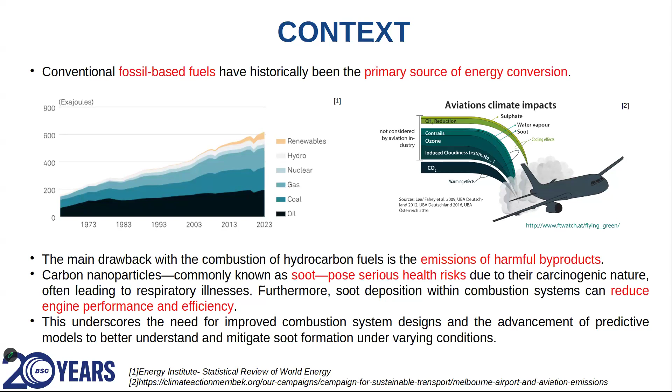There are other byproducts as well, out of which one is soot, which is basically carbon nanoparticles. And soot causes serious health risks because they're carcinogenic and they lead to different respiratory illnesses. And the other disadvantage of soot is that once it gets deposited, it can reduce the efficiency and also affect the performance of any combustion system. So because of these reasons, there is a need to better understand soot formation and also bring improvements in the models to understand and also mitigate soot formation.

So that's the introduction to what exactly soot is and how it is formed. Soot has been studied extensively over the past decades because of its health and environmental hazards. So basically, as I mentioned, soot consists of carbon nanoparticles that are generated because of hydrocarbon combustion, and it's a very intricate and multi-stage process, which I'll be explaining now.

So initially the fuel breaks down to form aromatic rings. This process is called fuel pyrolysis. These aromatic rings are called polycyclic aromatic hydrocarbons. The first soot particle is formed when two polycyclic aromatic hydrocarbons combine. This process is called nucleation. So this gives the birth of a soot particle. Once we have a soot particle, it combines with a polycyclic aromatic hydrocarbon to form a larger soot particle. This process is called condensation.

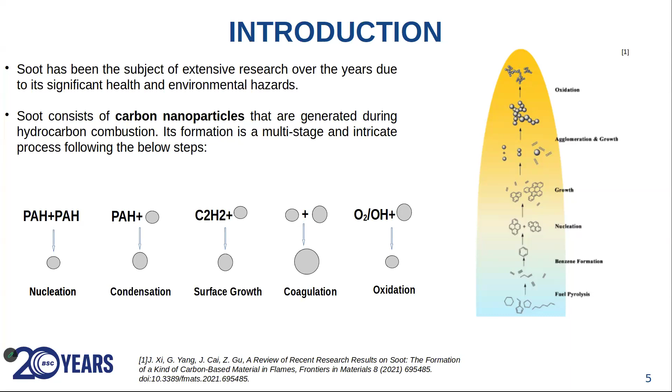Then we have acetylene in the environment. This combines with the soot particle at the surface, and it again leads to growth of the soot particle. This process is called surface growth. And once you have enough soot particles, two soot particles can collide and form a larger soot particle. This process is called coagulation. And once a soot particle comes in contact with either oxygen or OH radical in the environment, this consumes the soot which is being formed. This process is called oxidation. So these are the steps involved in the formation of soot.

So as I mentioned, soot has been studied over many years and across different length scales. First, in the micro scale, we study the interactions between the soot molecules. So that's the lowest form. We have two different types of models: discrete element soot model and also molecular dynamics. In this case, we study how two soot molecules interact, the molecular forces, the van der Waals forces, and the intermolecular distance between two particles.

When we come to mesoscale, it's an overall representation of soot. In that case, we have the Monte Carlo method, which gives us the particle size distribution of soot. But this method is computationally very intensive. And then we have the discrete sectional method. In this case, the soot particles are divided into sections or bins, depending on their size. Under this, we have two types of models, the univariate and the bivariate sectional model.

The other method is the method of moments. In this case also, we get the particle size distribution of the soot particles. But the disadvantage with the method of moments and the quadrature method of moments is that we don't get real-time information of the soot particles. This disadvantage was overcome in the direct quadrature method of moments, where we get real-time information of the particle size distribution.

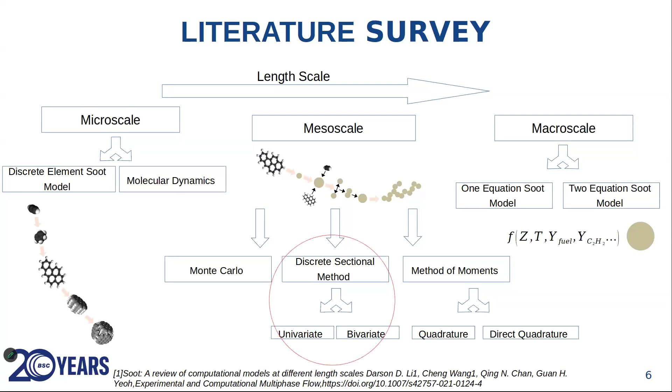So in our group, we specifically focus on the discrete sectional method, and specifically on the univariate and the bivariate sectional method. When it comes to the univariate sectional method, we solve only for one equation in each section, which is the soot mass fraction. And when it comes to the bivariate sectional soot model, we solve for two equations per section, which is the number density of agglomerates and the number density of particles.

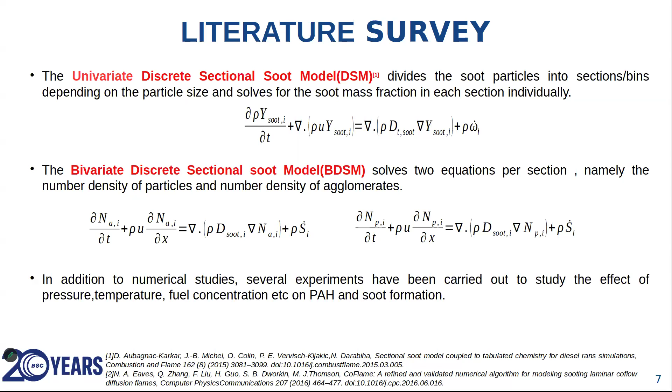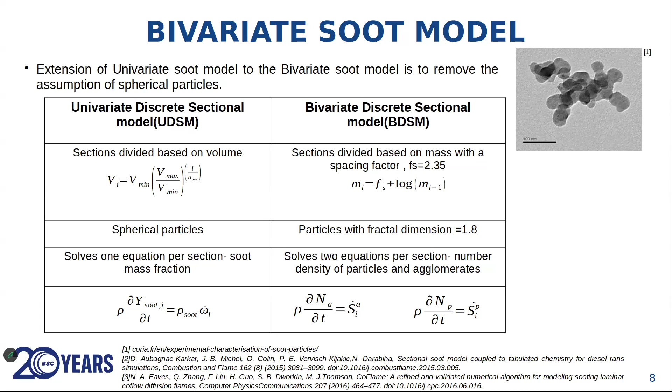So when it comes to the univariate soot model, we divide the particles in terms of volume. And in case of the bivariate soot model, we divide it into sections in terms of mass. In univariate, the main assumption is that it's spherical particles. In bivariate, we consider particles with a fractal dimension of 1.8. The univariate solves one equation per section, which is the soot mass fraction, and the bivariate discrete sectional model solves two equations per section, which is the number density of particles and agglomerates.

So the main objective of the work which I'll be performing is to develop models for predicting soot formation from aircraft engines. To reach this objective, we have divided the work into the following. The first thing will be to extend the existing univariate model to the bivariate soot model. Then we'll be studying the effect of the different processes which I mentioned before on soot formation.

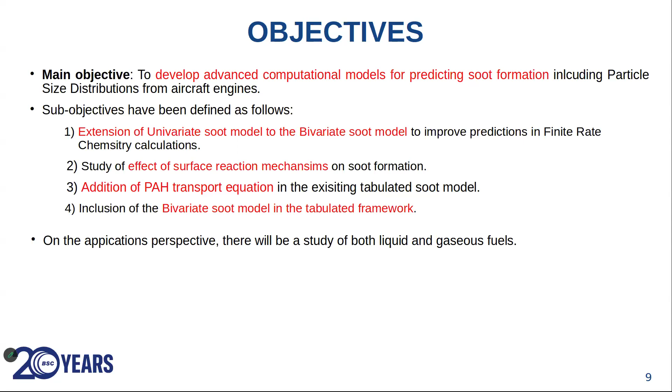And then we have a tabulated chemistry model in our group, so we'll be adding a transport equation to that to see how that affects soot formation. And on the applications perspective, initially it'll be gaseous fuels, but then we'll also be shifting towards liquid fuels as well.

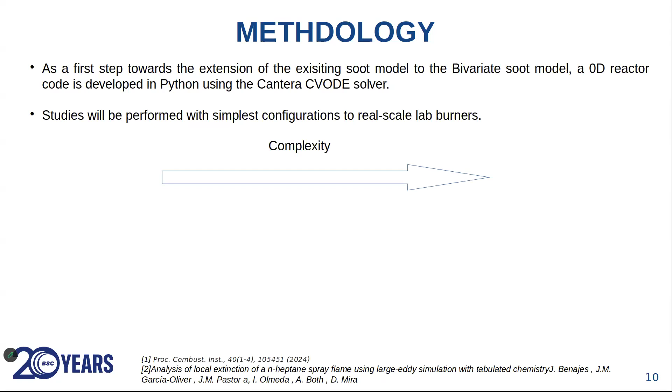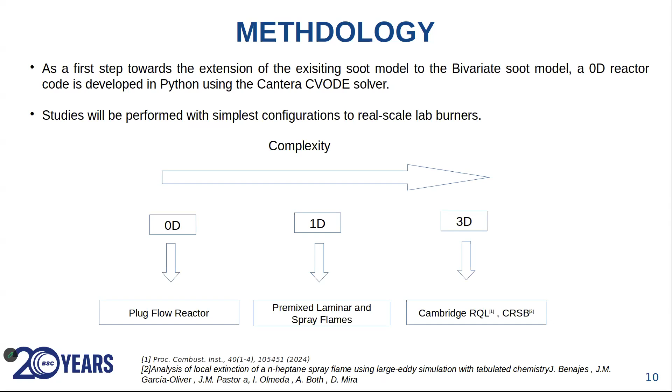So as a first step for going from the univariate to the bivariate model, a 0D code in Python was developed. Basically we'll be going from 0D to 3D, which is the most realistic case. In terms of complexity, we have 0D cases, 1D cases, and 3D cases. In 0D, we work with a plug flow reactor, and in 1D, we have premixed laminar and spray flames. And in 3D, we have realistic burners like from Cambridge and also the CRSB.

When it comes to the 0D plug flow reactor, it means that we don't have any variations in the transverse direction. That's why it's called 0D. For the code development, a temporal transformation was applied, and we solved for the species and the temperature. Also, depending on the soot model, either univariate or bivariate, we solve either one or two equations for each of the sections.

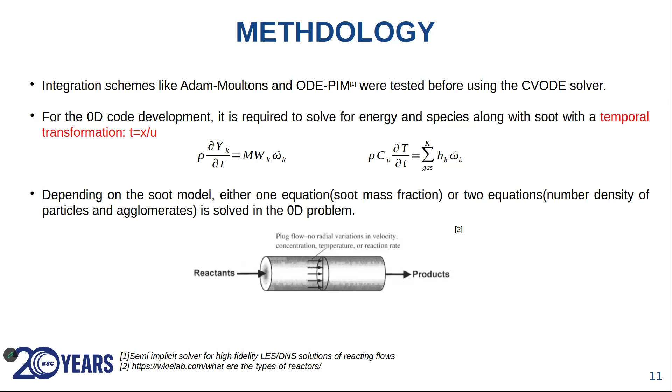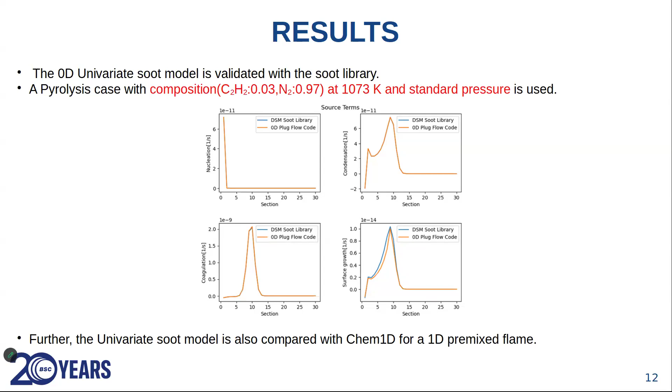The validation of the 0D code was performed with the existing soot library in our group. This one is the results for the univariate. This was to get confidence that the code developed in 0D works well with the already existing code. The next step was to check if the 0D code works well for the bivariate model as well. For the bivariate model, we have the nanoparticle plug flow reactor, which is an open source code, so the 0D code was compared with the results from the nano plug flow reactor.

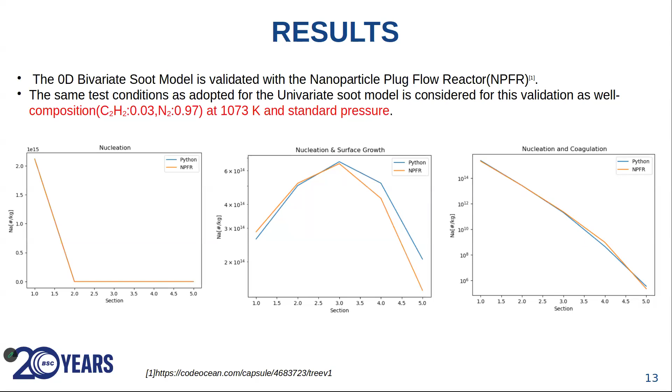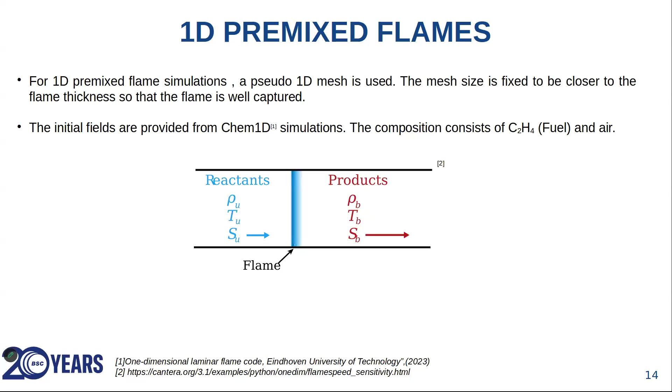The next step was to go to with soot. With soot, we also plotted the species involved in soot: pyrene, which is the PAH, and C2H2, which affects surface growth. And finally, the last figure on the right-hand side is the soot volume fraction. Basically we had good comparison between both Chem1D and Alya. So 1D premixed flames worked well.

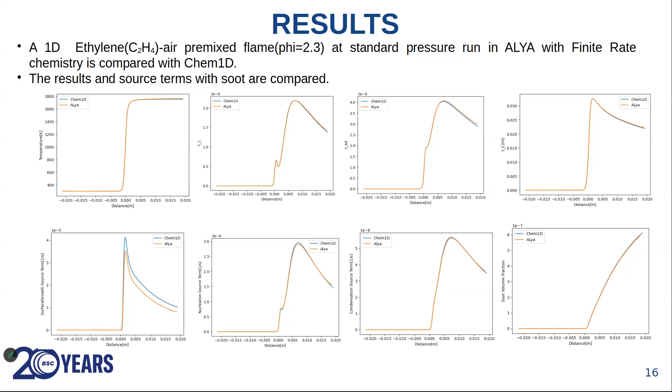So the next step was to switch to spray flames. This one is to bring in the applications perspective, because finally in any combustion system, you introduce liquid droplets in terms of spray or injection. So which is why we had to shift to spray flames. In terms of spray flames, we took two fuels: Jet A, which is the normal aviation fuel which is used, and SAF. SAF is sustainable aviation fuels, which is the trend nowadays because we are moving towards more environment friendly fuels. So basically sustainable aviation fuels are synthetic fuels which are produced to reduce the pollution which is caused by the existing aviation fuels.

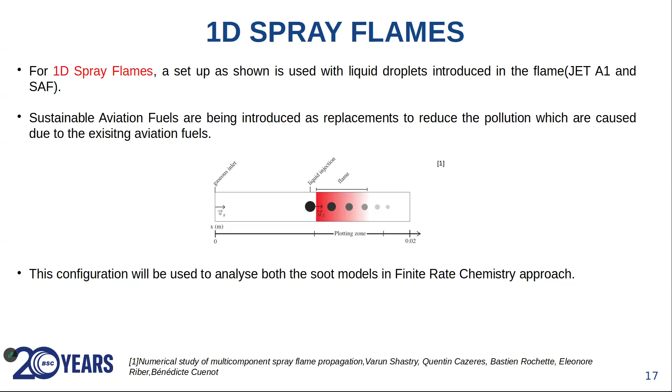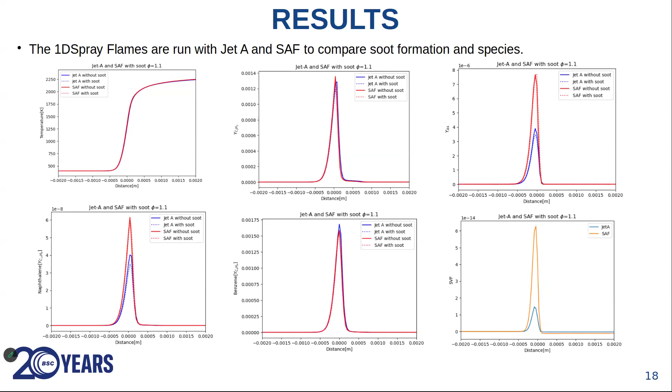So these are some very preliminary results between Jet A and SAF. We can see that in this present case, the SAF which we are using has a higher aromatic content. When you have higher aromatic content, it means you have more PAHs, which means that obviously you're going to have more soot formation, which is what we will see on the soot volume fraction figure. And also you can see that the pyrene level and also the naphthalene level, which are PAHs, are more in SAF compared to Jet A.

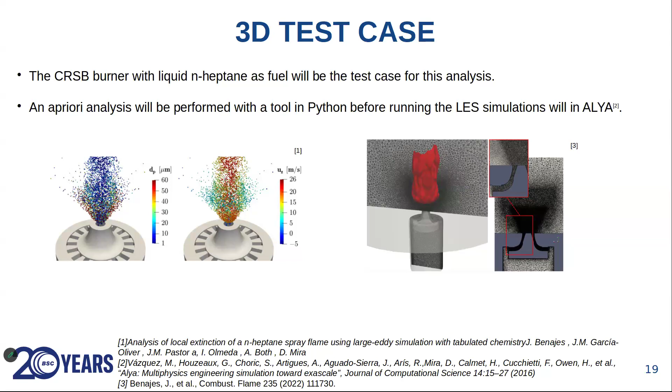The next thing is coming to 3D in terms of burner configurations. So this is a CRSB burner which uses liquid n-heptane as fuel. And this is how the burner is. So coming to tabulated chemistry in the group, there are two ways of the tabulated framework approach. One is FGMC, in which the species mass fractions are tabulated and the soot source terms are calculated during runtime. And the other is FGMT, where both species mass fractions and the soot source terms are tabulated.

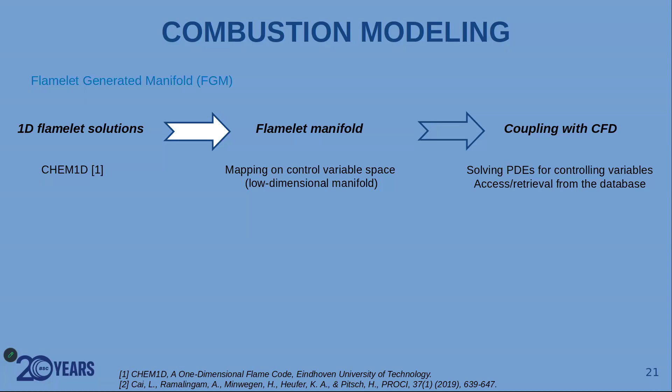So when it comes to tabulated chemistry, we just run 1D flamelet solutions with Chem1D, which is very easy and very quick. We generate a table from those 1D solutions, then we couple it with the CFD, and you just look up into the tables for the source terms and values, which makes calculating the CFD easier.

So the progress of soot modeling in our group. Initially, the first step was to check if the tabulated chemistry works with the sectional soot model. Once that worked, the next step was to try it with the flames which are there. The flame which was tested was the Sandia flame. And then the next step was to see if the clustered DSM model works. For that, the flames used were the DLR and Cambridge RQL burners.

So these are just some results for the Sandia flame. The Sandia flame is just an open flame; it's just open in the environment and doesn't have any bounding conditions. In this case, it was run with LES and the discrete sectional method, and it was tested for both tabulated chemistry approaches. These figures show the instantaneous fields of the species and temperature. On the right-hand side, we can see the soot volume fraction compared with the experiments for both approaches. This still shows that the soot modeling still needs improvement, because soot is very difficult to capture, and it's very intermittent. So we still need to try and improve the models.

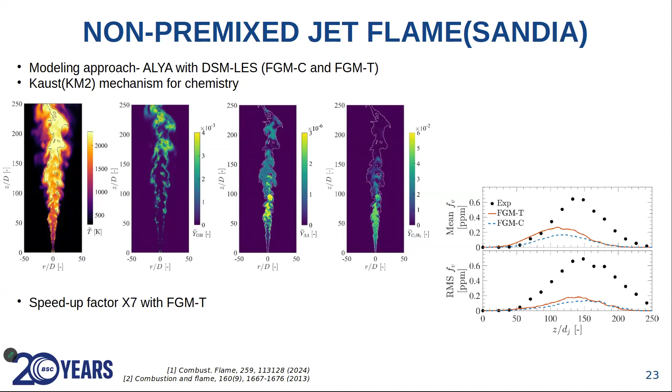So one of the major outcomes of this thing was when you use FGMT, the simulations had a speed up factor of almost 7 times, which showed that FGMT is computationally very strong.

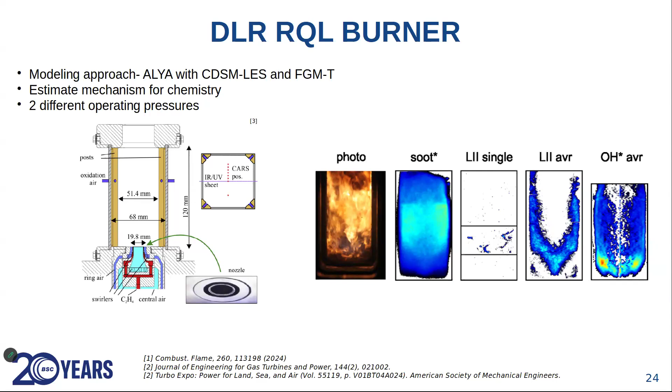The next one is the DLR RQL burner. Basically you have the fuel coming in through the center, and then you have air coming through the swirlers, which forms the flame. In this case, the clustered sectional model was studied with the FGMT. The experiments were for 2 different operating pressures. Comparing the experiment and the LES, we could get a very good spatial distribution comparison, and the peak values, concentrated in the center, were also captured.

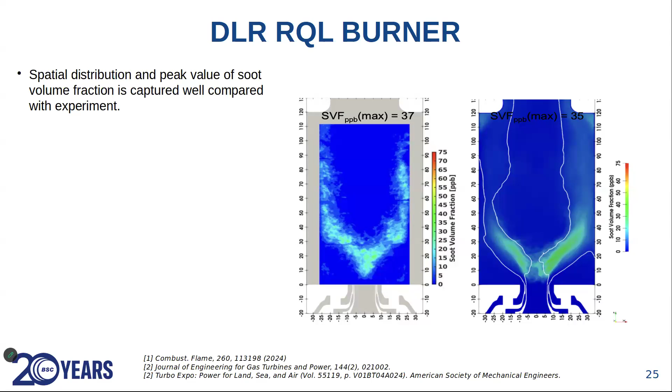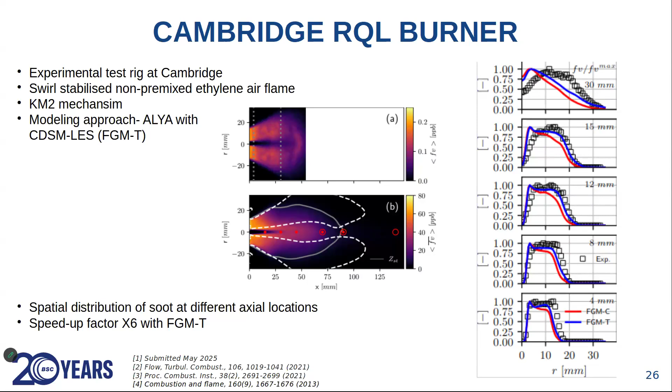The Cambridge RQL burner is an experimental test rig. In this case, we just have a non-premixed ethylene flame, and we also studied the clustered DSM with the FGMT. On the right-hand side is the radial profile of soot along the different axial locations across the flame. This was pretty well captured. And there was up to 6 times speed up factor when you ran with FGMT.

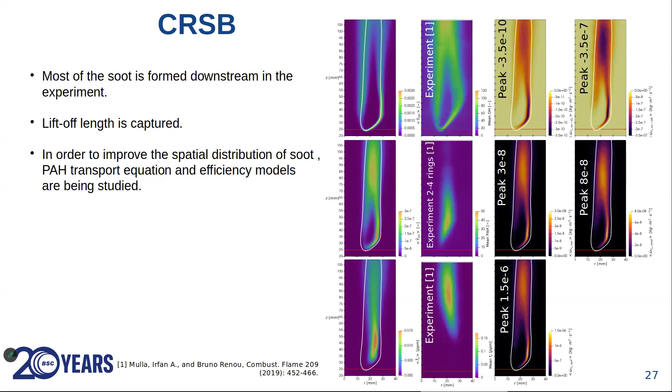When we check the source terms, we could see that the nucleation source term was high in the place where the soot is produced in the simulation. So we are trying to improve this by adding efficiency models to the nucleation model which is already there. And we are also trying to integrate a PAH transport equation into the existing tabulated chemistry to check if there is any improvement in these results.

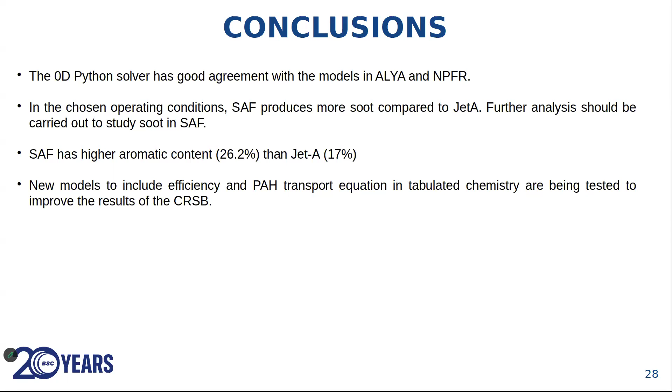So far, we have a good agreement with the models in ALYA and NPFR for the 0D code. As I already mentioned, SAF produces more soot, but that's because we have more aromatic content in the SAF which we are using now. As ongoing work, we're studying new models to improve the results which we saw in CRSB. So, yes. Thank you.

The increasing proportion of aromatics in SAF compared to Jet A1 is translated into a similar growth of soot production. Is the proportion kept, or is it kind of exponential? You have, I don't know, 9% more aromatics in the SAF, and this triggers the formation of soot, and you get much more soot.

Before you answer the question, could you repeat it close to the mic, because I'm sure people online probably cannot hear. Oh, but you can go there. Yeah, she can repeat the question, or you can go there, anything is okay. Go. You have time. Yes.

The question is, in which proportion does the soot increase in SAF compared to Jet A1? Is the increase in soot in line with the increase of higher aromatics that you have in SAF compared to Jet A1? So yeah, this is ongoing analysis. As of now we are using SAF with higher aromatic content. I'm still not sure if it's equally adding up to the soot formation. So that we'll have to check.